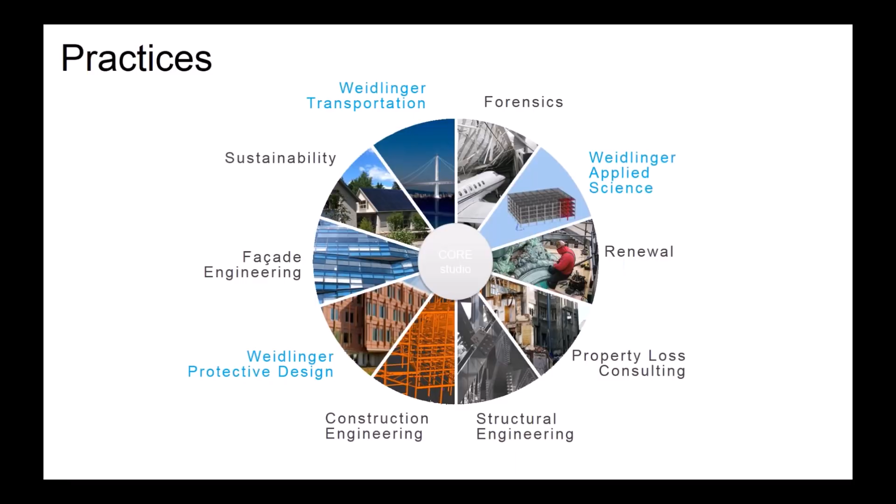If you don't know what that is, it's sort of our incubator for research, but more importantly, the center for our computational modeling and application development. It's sort of the center of all of our practices. That's the idea behind this. And we do a lot of these things - many more things than just typical engineering. Structural engineering would do renewal, property loss, and facade engineering. That'll make sense later when you see some of these projects that are not exactly structural engineering. I had this slide in there to make the point that we're a big firm, we're everywhere. I'm not saying that to sell TT, but to explain that not all this work is mine.

I couldn't fill an hour or 45 minutes with my own Dynamo work. It's not interesting enough, so it's a lot of other people's work. Forgive me if I stumble on any of it, but I know it somewhat intimately.

This is Core Studio. A lot of us are developers, and a few of us are more modelers, which is kind of the work you're seeing now, the Dynamo work. I'll mention a few tools we've developed that are Revit tools, but that's like a whole other presentation. Then we have Konstru, which is that break-off interoperability software that you may or may not have heard of, but I'll show a little bit about it.

More on Core—this is the different arms of the development stuff, like some in automation, some in visualization, some in interoperability. There are these different sort of wings of work. But I'm just going to jump right in.

This is perhaps the most in-depth one I'll talk about, and the one that's gotten the most traction in our office. It was very simple, low-hanging fruit in a way, and that's what Dynamo is good for. This is our RAM concept to Revit Rebar tool.

RAM is a structural software that we use. It does floor design essentially, and also does rebar design. What you're seeing on the right is the rebar placement by the software once it knows the loads and whatnot, and knows if it's PT or whatnot.

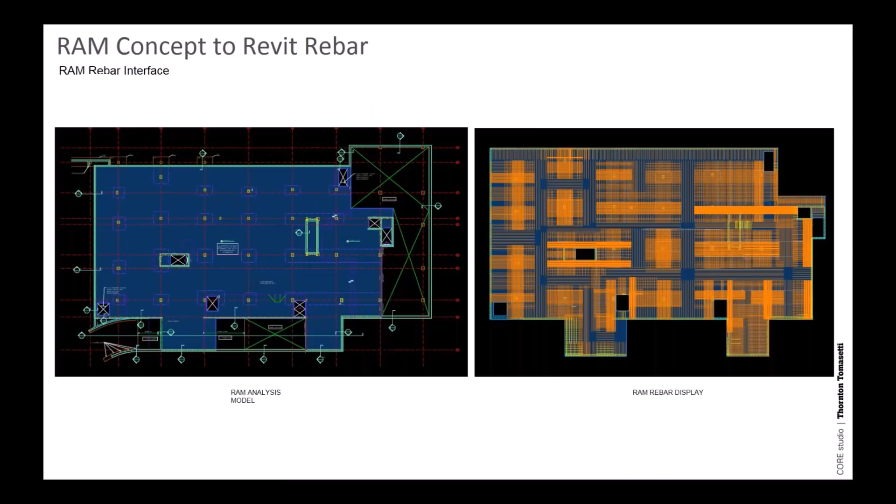It usually goes from this to an engineer who then simplifies and extrapolates, making assumptions. That markup goes to the modeler. We have dedicated modelers in the structural engineering practice, which is not as common in architecture, but perhaps more so now. Then eventually the modeler or drafter creates these drawings from that markup.

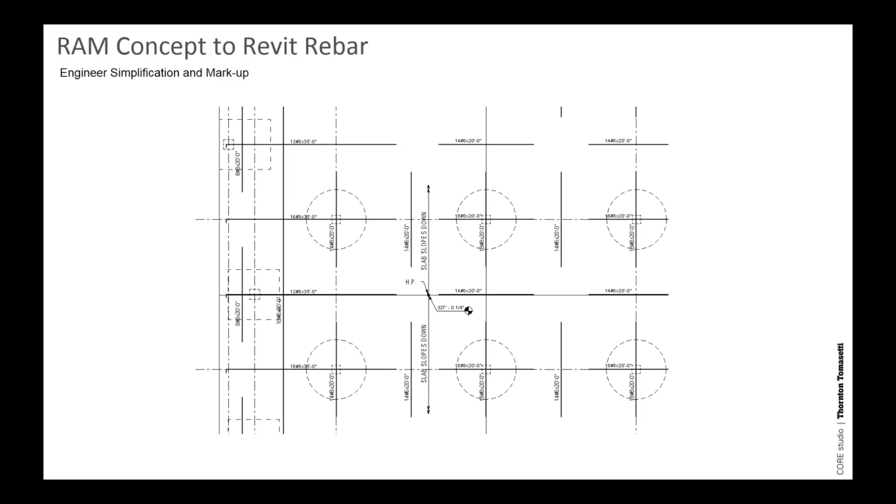It's a kind of dead one-way process. So we use Dynamo to create a direct connection, and in a way a loop, so you can go straight from the analysis software into Revit, which is an obvious benefit and makes that so much faster. You can imagine how long it takes to go from this to that, on every floor. So that was a low-hanging fruit, we should call it.

A couple of the things I'm presenting start from Dynamo and then end up as a custom tool that's later developed further. This is a great example of one. Dynamo becomes the proof-of-concept place where you can mess around and it's loose, and then later we push it to the developers who actually program it, making it a built-in Revit tool that you don't touch in Dynamo anymore, which I'll show later. There's a couple instances where that happens, and I think it's a common flow.

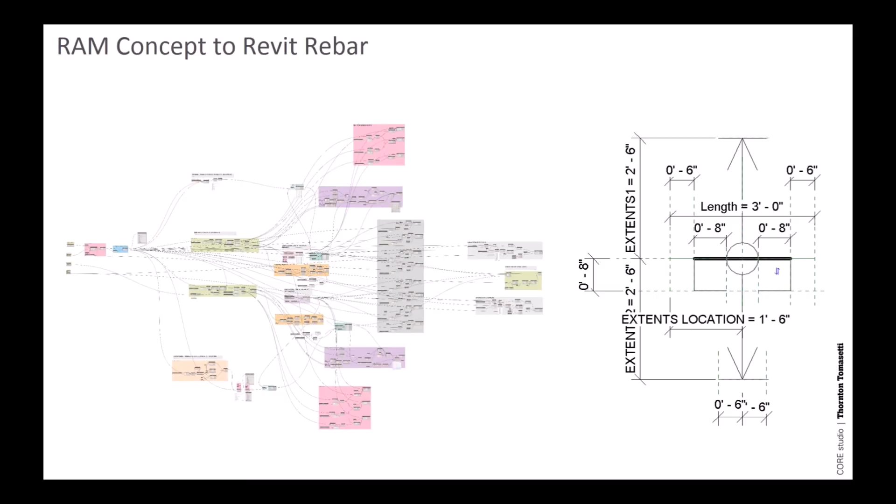It's like you test it with Grasshopper first, then with Dynamo, and then perhaps make a solidified tool from it. Or there's a workflow from Grasshopper to Dynamo—there's a lot of those, because it's so much lighter for optimization. The output is a database which has coordinates and other markings, like what the rebar size should be and at what spacing. So there's your Excel file, and that's a simple import into Dynamo.

I figured you guys knew Dynamo, or at least wanted to, and wanted to get into the guts a little bit, because it's the user group after all. So I thought I'd talk briefly in some places about the actual components we're using, or at least medium level in the components, instead of just higher level stuff like 'we did this and this.'

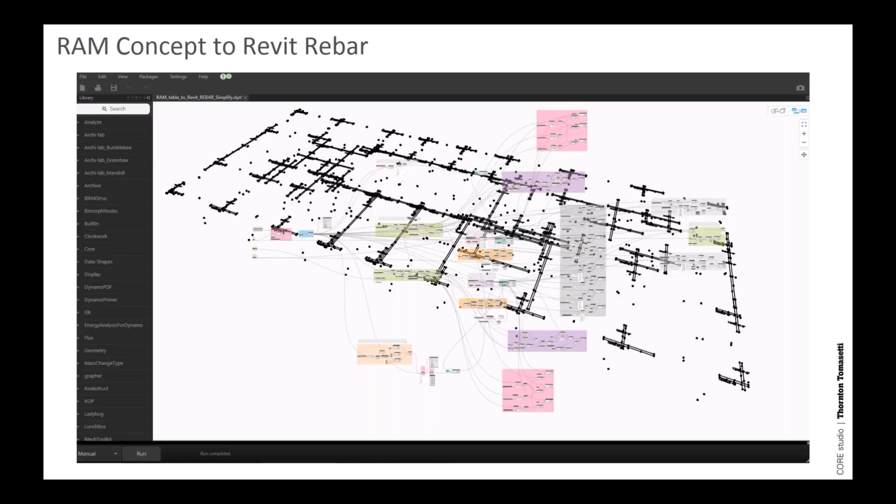So for instance, here's the inputs. It's pretty simple—you're getting your file path, and it's then sorting through Excel. The first part is you make the component first, you guys probably know that. You're instantiating the family, the detail, or the tag.

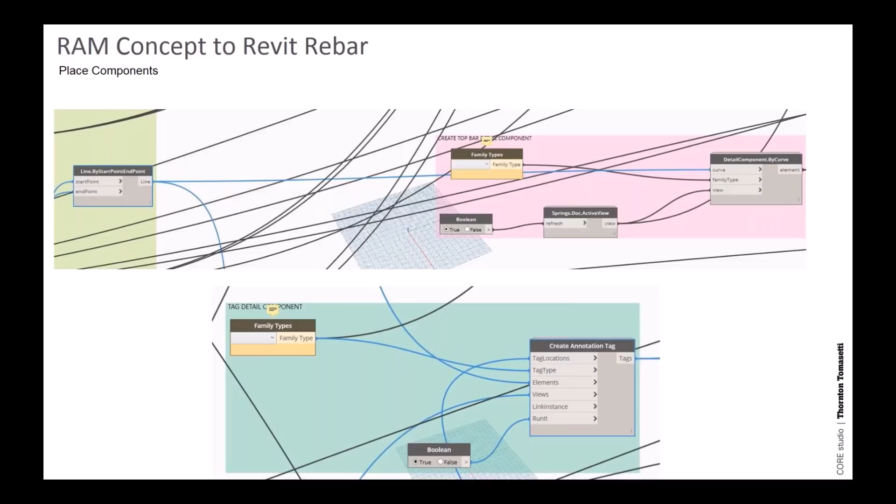In this case, the detail component—that part is a Python script that is taking the curve you made and placing it into a detail element, and getting the right... I forget what this part is doing.

Anyways, it's a script. Not everything is visual coding - Dynamo is so clunky in some ways. When you're banging your head against the wall, it's better to just code it, because it's hard to do if statements in visual coding in general, like in Grasshopper. And loops - we're in two while loops here - visual coding just doesn't lend itself to that sort of thing. So jumping into Python is way easier.

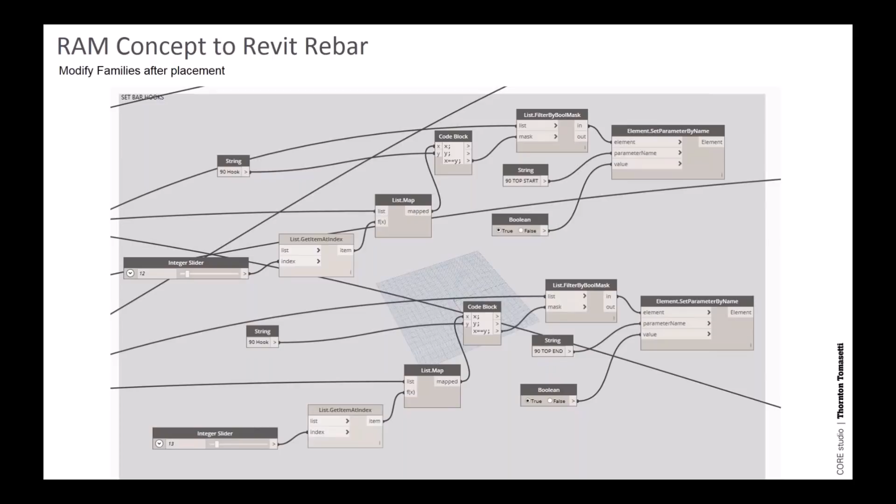The first step was putting the families and components, the elements in there, then you modify them and give them their data. So here we're giving them their tag names and all that extra data - the rebar size, filtering it out of the Excel and applying it with Element.SetParameterByName. You probably know that one if you use this - you use that a lot when you're getting into Revit.

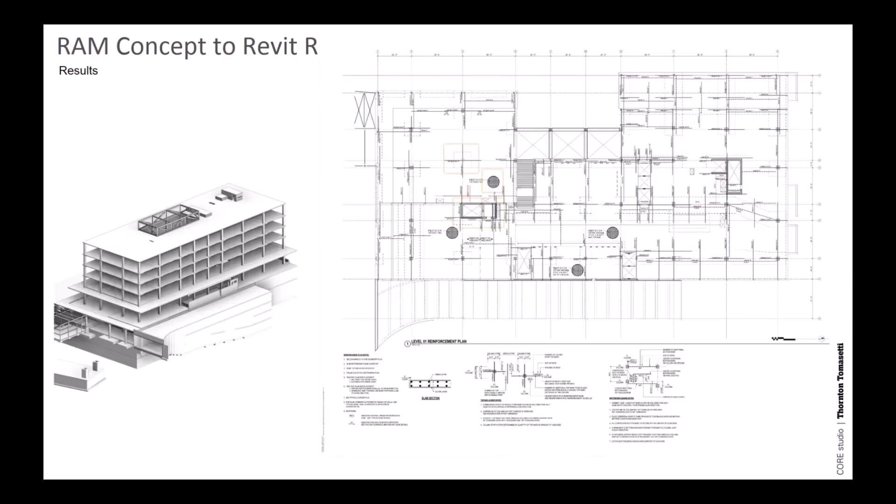So the final result, a building like this, there's your plan, and for every floor you have to do it with Dynamo, but it's so much faster. It's saving weeks of work essentially, more if you multiply it around the firm.

So it was obvious that we should make it into a tool, and this simplifies it much more. Looking at the Dynamo on the left versus the interface for the tool on the right, it's so much simpler, and engineers in our office can use it without having to worry about being intimidated by this or having to open that up.

In this case you can do the whole building all at once, which is way faster than even before. This allows you - it's made in Visual Studio - and this particular code, I forget what it was doing now.

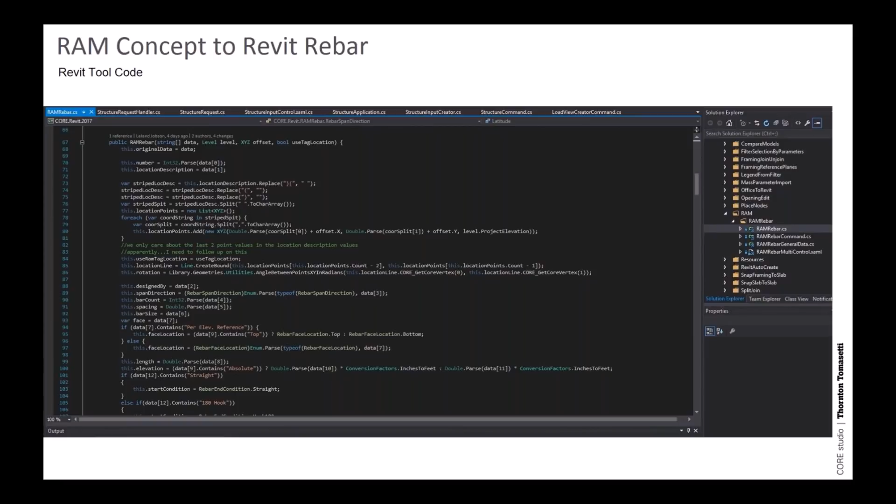Oh yeah, it's sorting through the points and placing the line first. There's a lot of these families. It's a few weeks of work to make that tool, but I think the payoff is pretty obvious in this case, and we always do this with the tools to prove their viability.

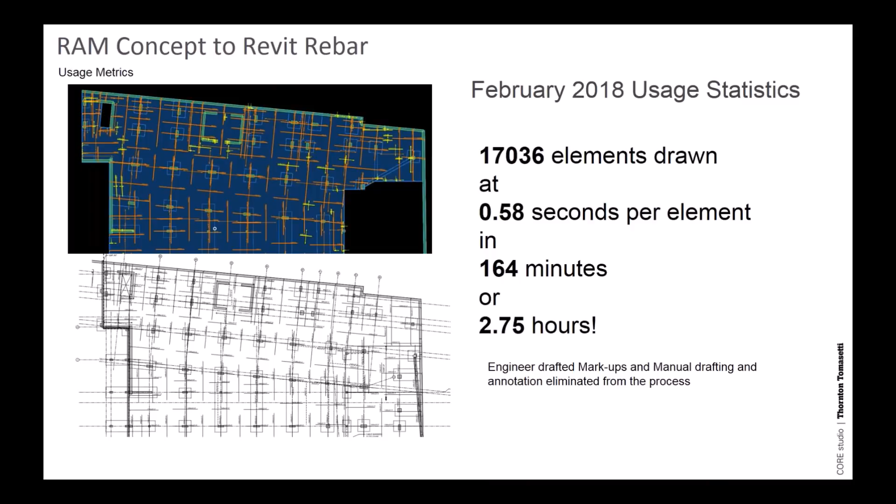The user statistics so far - we collect statistics for all of our tools. I guess that's not time saved, but that's how much it's been used. It's not that useful, but this many things have been drawn, and if you multiply that by how long it would take to do it the normal way, you'd get probably something like 200 hours. That's what's missing in this graphic actually.

So I'm just going to go through a lot of little fixes - we just use Dynamo for all these little fixes here and there, you guys are probably the same. I'm going to go through a bunch of them. A lot of them are translations between different things - this is ETABS to Dynamo into Revit.

Konstru works really well for all this, but sometimes there's more custom stuff. In fact, I know this is custom because the walls are canted and twisting a little bit, and Konstru wasn't dealing with that at the time. What was I going to say about this?

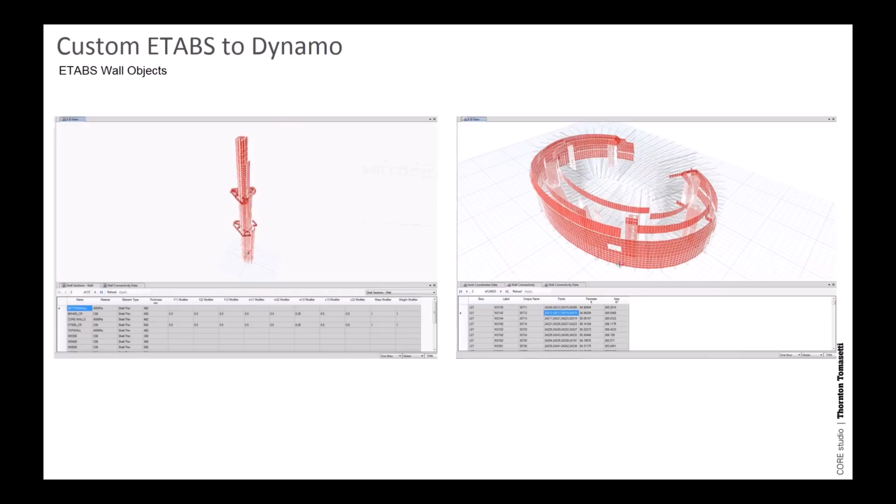ETABS is another structural software that we use. It's for framing and floor design, and it's good for towers. So same thing, you're exporting.

I think this is with Rhino - getting the lines in, recreating the curve, wall by face, recreating the wall like wall by face, or getting the individual panels that you had there. Then ETABS, you can see they're built in, and then building your curve larger so it's a more continuous wall, and then wall by face, with a slight amount of twist in it.

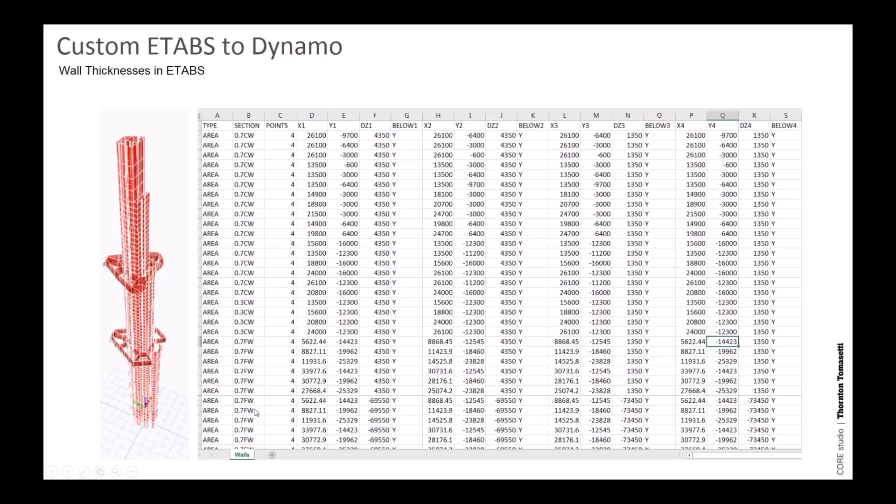And then apply a curtain system to that. For the core of that building, you're doing walls but need to apply thicknesses, and you can see that output from ETABS has these different thicknesses throughout, so grouping them and applying them with Dynamo.

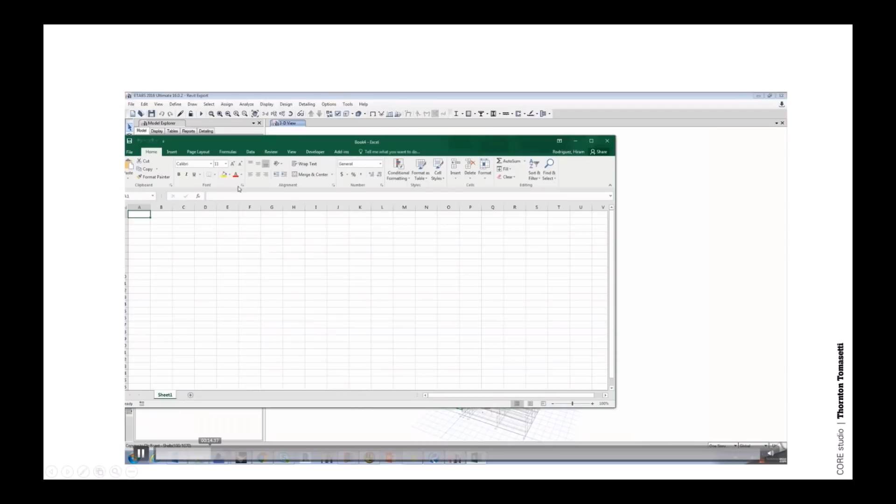I think I have a video of that, but these videos are often a little bit slow, so I might jump forward. So there's your ETABS model with different thicknesses. Send it to Excel first to get the thicknesses, and probably Rhino for the geometry, then we're importing those thicknesses and applying them, grouping them.

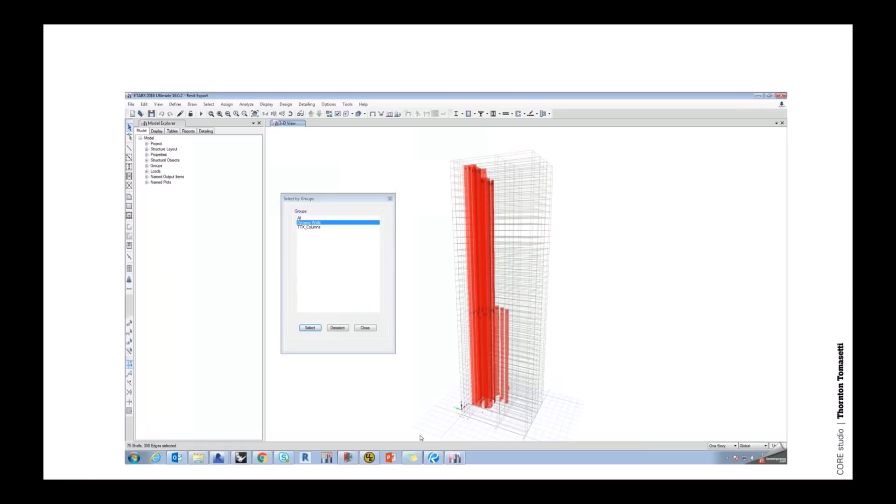So that's the simplified version, but a kind of what would have been a fairly complex task, slightly simplified in Dynamo. Same for pier design. This one is a little more—you could of course do that with other transfer methods, but Dynamo just speeds it up with the assignments and things. I think Konstru can basically handle this now, but that again is a sort of proof of concept that we then build into other softwares. That's how a lot of these work. This process works.

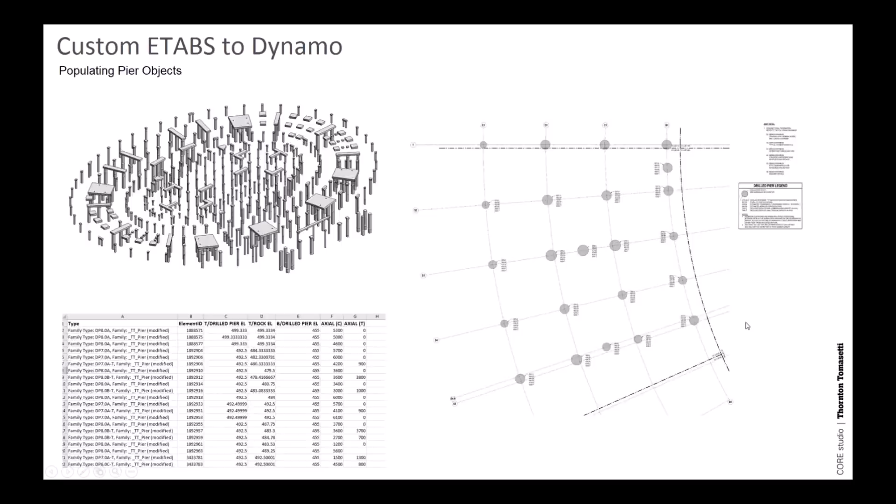Custom pier inputs. There's a bunch of different parameters and tags that go with the pier. This is the final plan you need in Revit. So you've got a few different parameters first that you have to design for, and then that end up in the tags—what that ends up looking like in plan, and a few different parameters that need to get into the design software, which is actually in this case an Excel file. There's a couple instances, especially with axial loaded things like columns and piers, where we just use a very complex Excel file to design them. So basically, we're making the building in Revit, and then with this custom pier family that has all these parameters, we're exporting that to Excel.

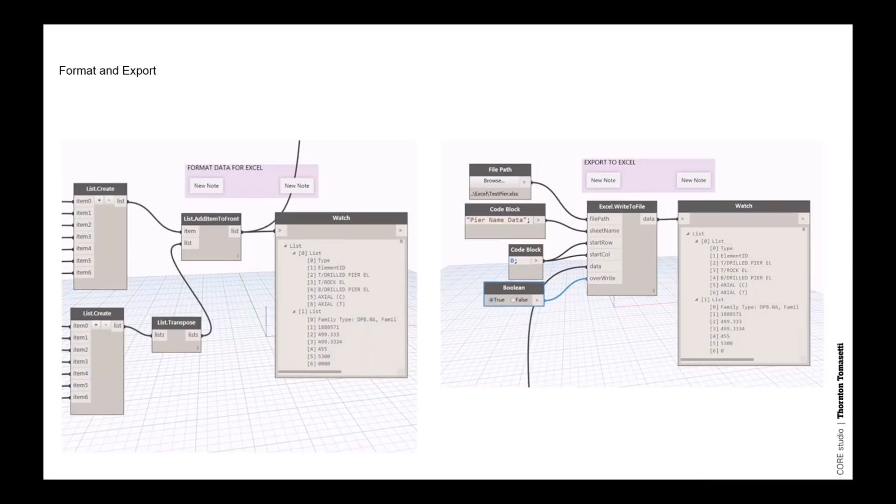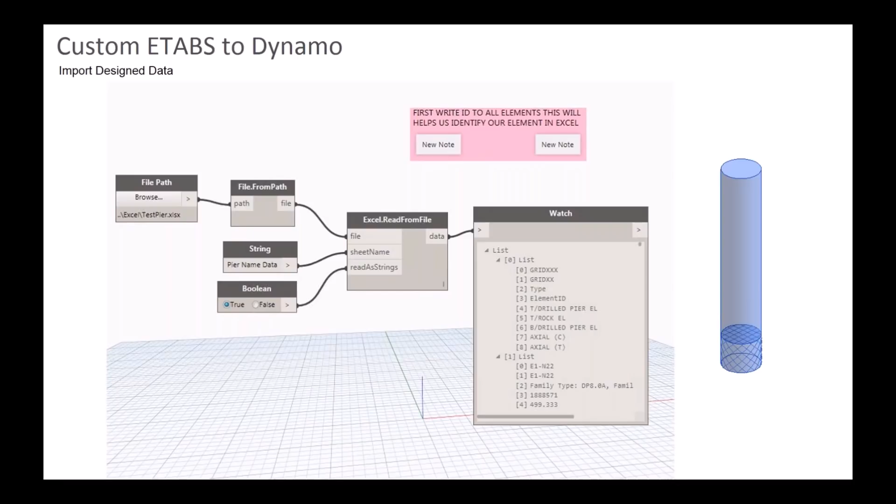So this is all sorting it for Excel. These are the different headers, and then using Excel to design the pier with the thickness and length, or perhaps just thickness and rebar count, and then importing it again, and applying that to that family—instantiating the family, or setting the parameters again for the family that was already there. That updates the tags and gets you the drawing you needed.

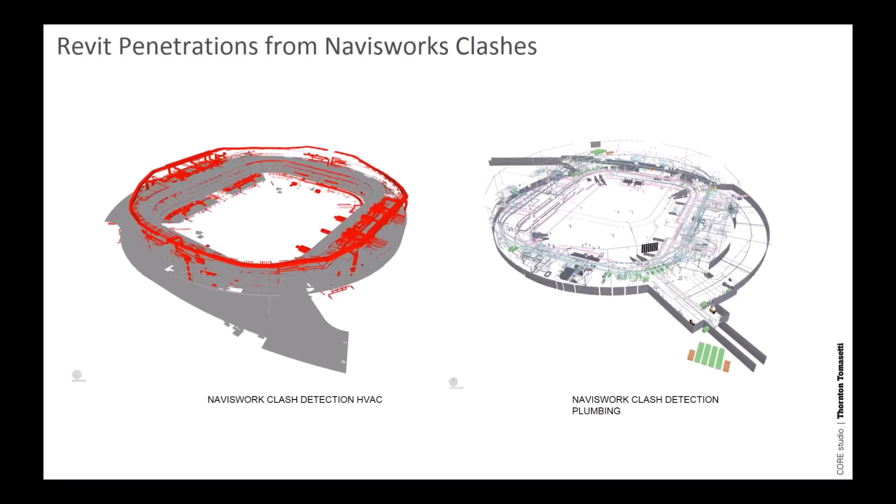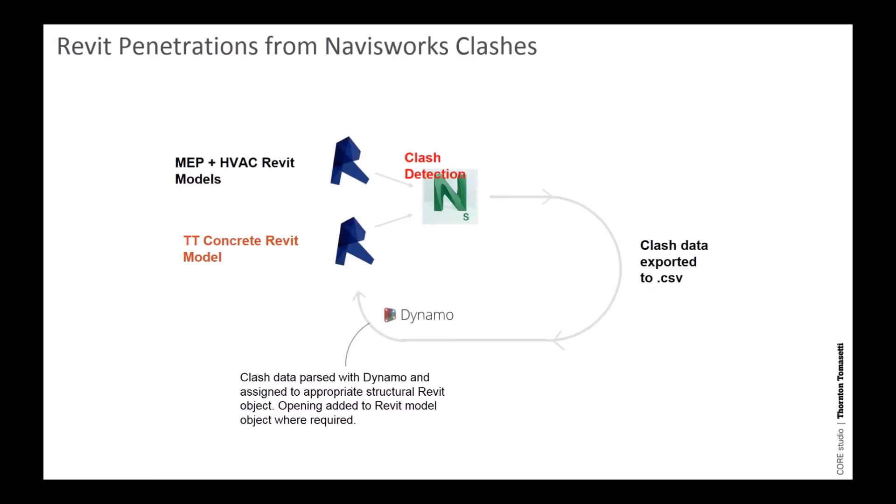Using Navisworks, using clashes, like designing Revit penetrations with the Navisworks clashes. So there's your clash detection in Navisworks. There's HVAC and plumbing—put those together, and we've got to design these openings in our shear walls or any of our concrete. So basically you're building them in Revit, you go into Navisworks, and through Dynamo you go back into Revit and adjust the concrete model after you get the clashes. I think there's a video. And the Navisworks imports were custom tools that I think are probably out there.

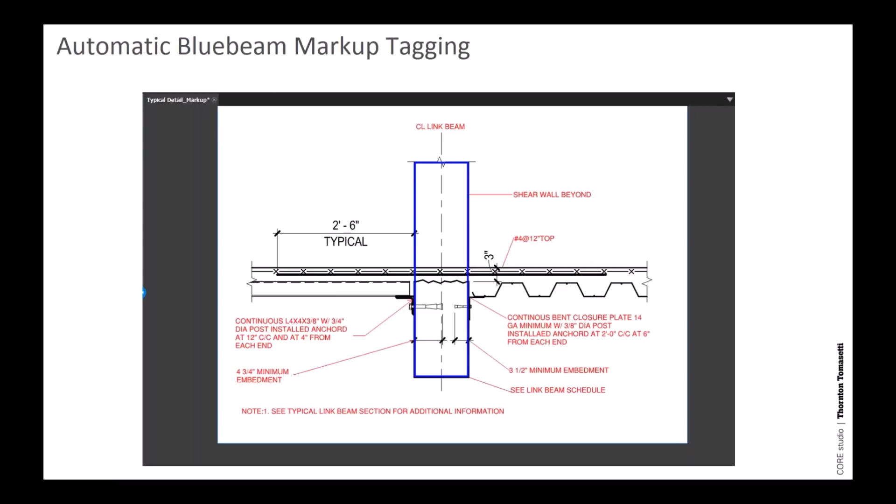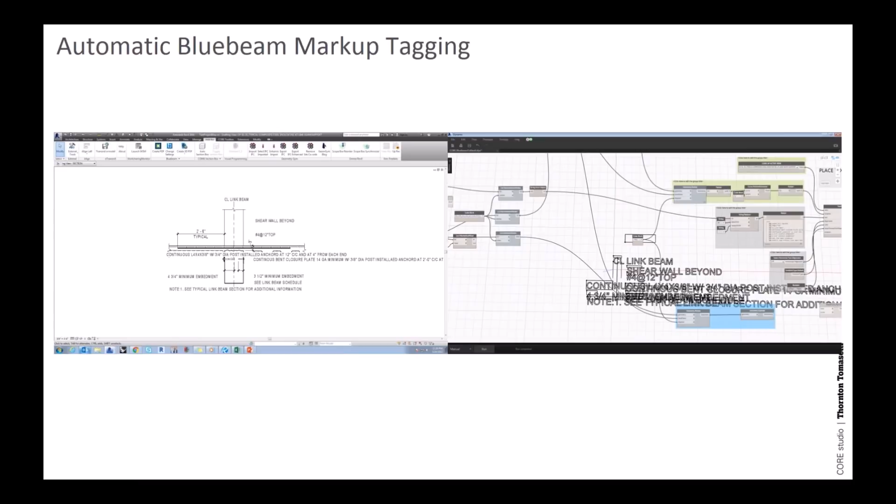And then Bluebeam to Revit. This is just another example of how the engineers make these markups, and it takes time for the modeler to then put them into the Revit file. So we could just automate pulling it in—the drawing started in Revit, that's on the left, and then an engineer marks it up in Bluebeam with these tags, and then with Dynamo we can bring in the tags and apply them to the actual detailed drawing, and even draw the leaders and stuff as they were in Bluebeam, though of course Revit treats the point-to-point different, and some of the formatting is different, but that speeds up things a lot, and takes less work for the modeler, and then the engineer can just sort of work a looser way.

You don't have to always be in Revit. I think a lot of these are about getting out of Revit, simplifying that whole thing. I think this was a video, but again, it's probably just what you already understand. And the Bluebeam import was a custom thing we had to write—one of our Revit API guys figured out the Bluebeam thing.

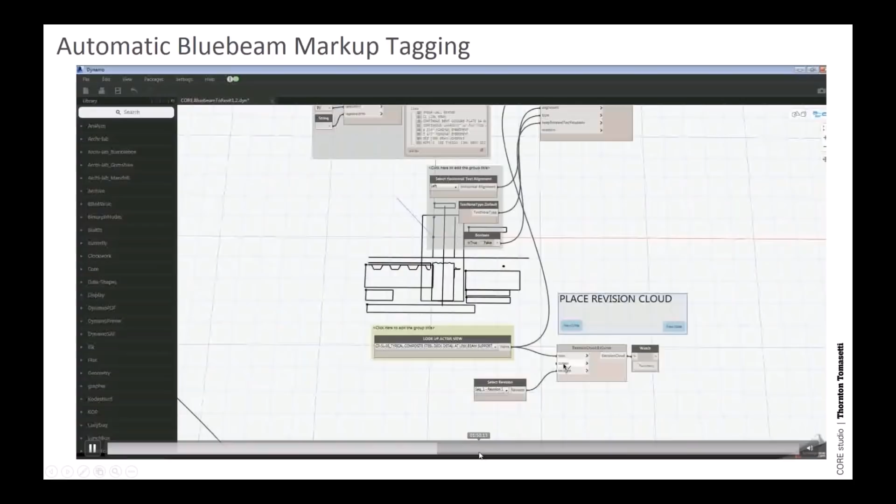So you're calling that file, and then you can imagine what this is doing. And then there's revision clouds too—yeah, so there's the cloud. Yeah, and this one is just showing revision cloud placement as well.

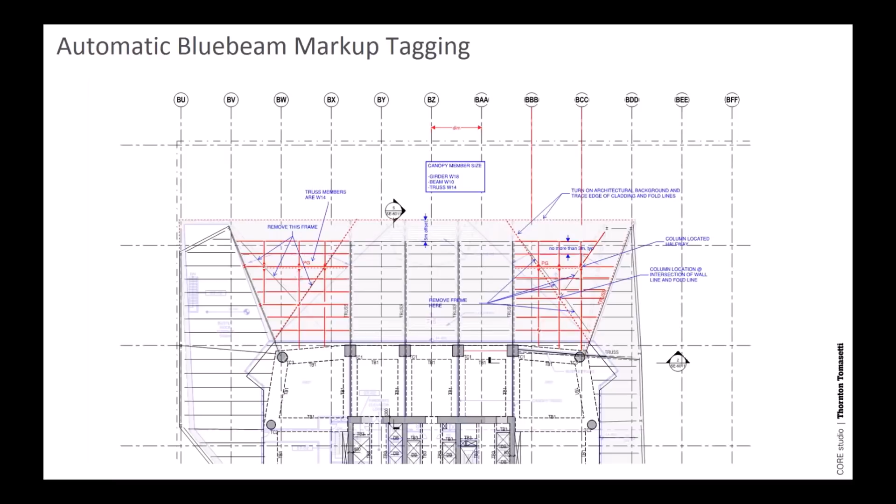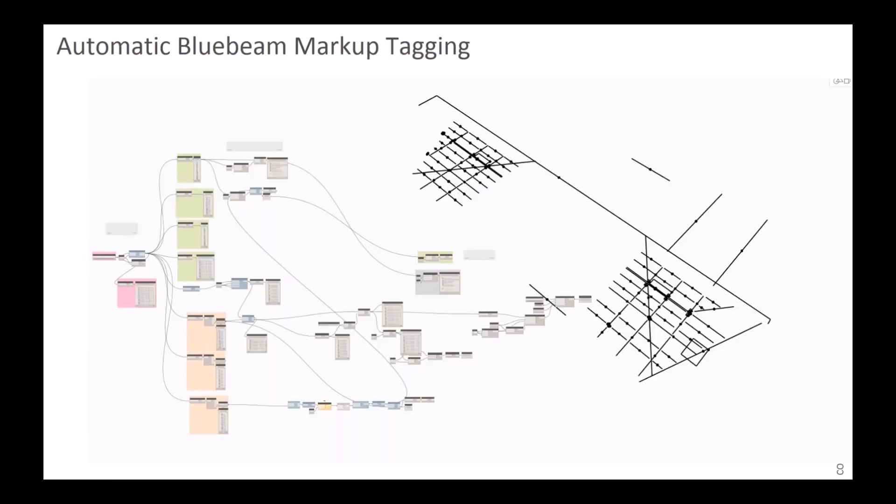And then taking that a little further into actual modeling, mark up a plan. In this case, all we had were the structural plans, and we knew that we needed a new beam system in these areas. We had a Rhino model and not a Revit model. So we're bringing in from Bluebeam these frame design drawings with sizes, and then bringing that into Rhino, and using that to project it to the surface that's needed, because you're starting with a 2D, and in Dynamo you're 2D, and then going to Rhino for the projection, and then back to Revit.

I think that's a video as well, back to Revit eventually. But in this case we're using Rhino for sizes, and also using Rhino to kind of check the model against an existing Revit model. So there you're seeing the new beams are over there, and then these existing beams are changing in shape a little bit—and there's the roof surface.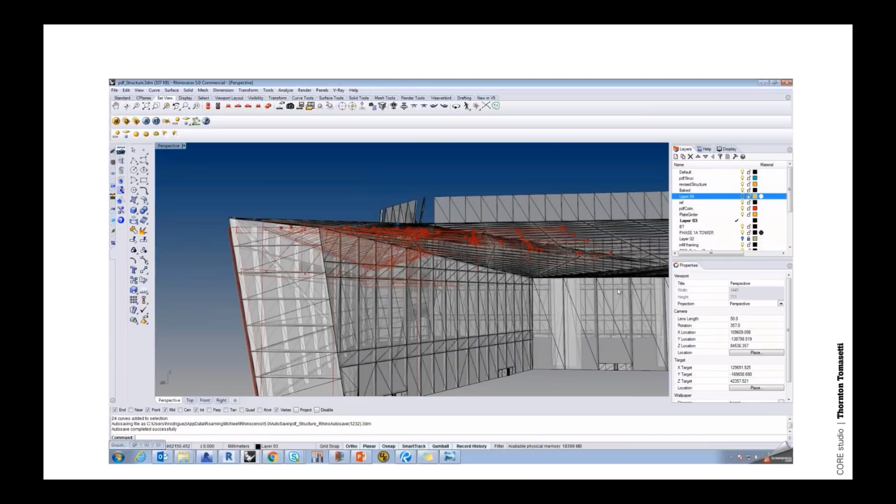So we're comparing, and then we'll go back into Revit with Rhino again. So there you're seeing it come back in - I think we were matching these, or finding similar ones and then adjusting them so it's not doubling up on beams that existed already.

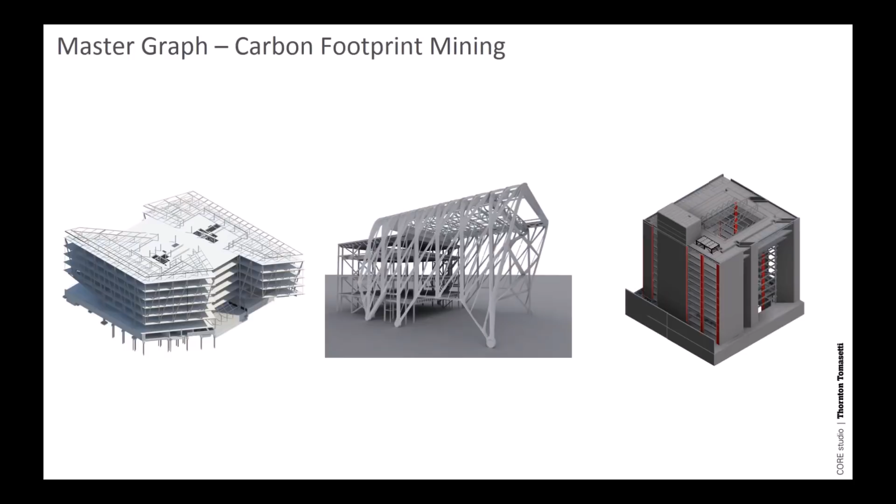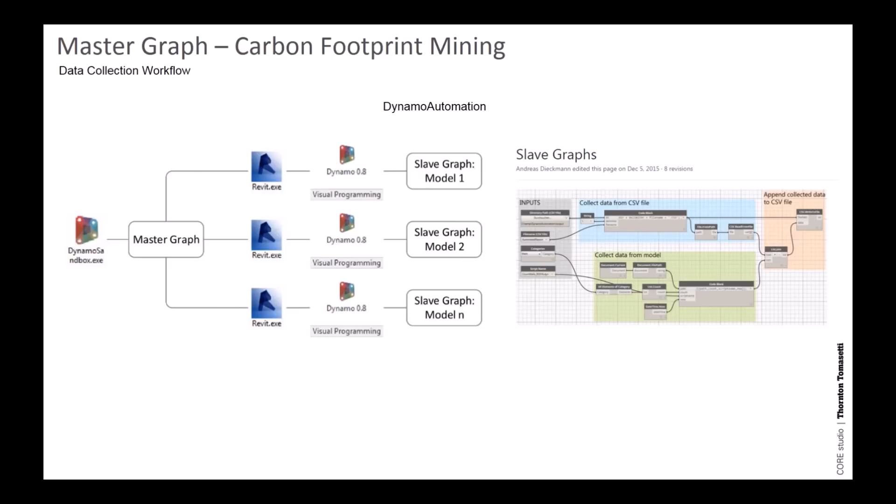I don't know if you guys have ever used MasterGraph from Dynamo Studio. We were using it to get a database of carbon footprints for all of our buildings. Now this is its own kind of data mining tool, but initially we were testing it with Dynamo using MasterGraph, which has slave graphs. The MasterGraph goes through and tells it where every Revit file is for each project, and then the slave graph queries that project for steel amounts, concrete tonnage, concrete volumes, and that sort of thing.

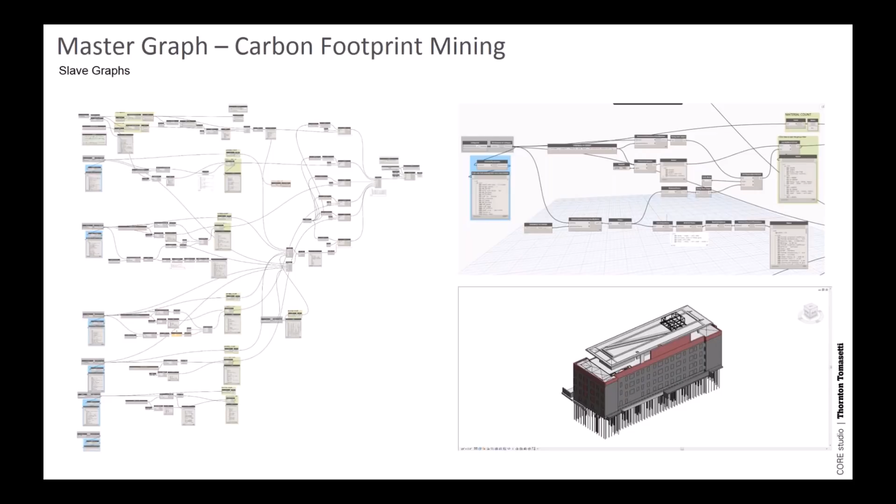So this is the master, looking for the folder and writing the journal that it does, and then the slave graph, which looks through the model for total steel numbers and compiles that, so you get total volume or area of, say, concrete - in this case all these different kinds, which makes it kind of harder. I guess this is by floor as well, or level.

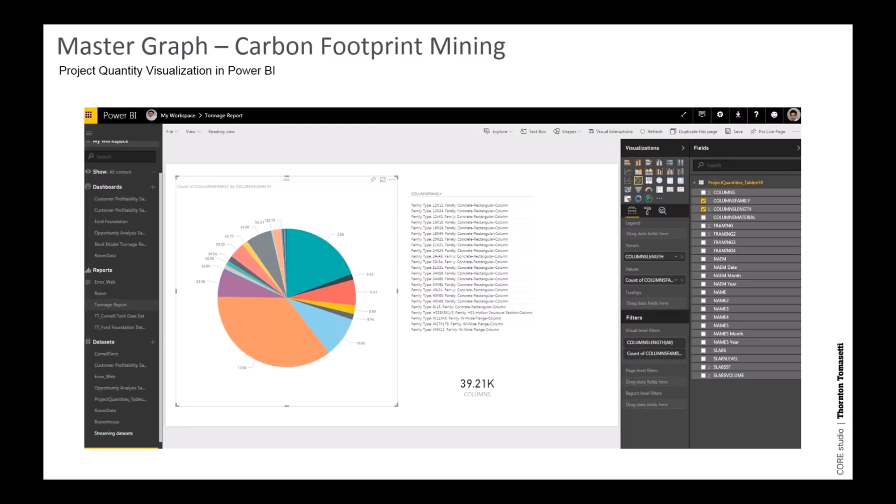We were just looking at all that data at the time in Power BI, but we've turned this into what we call Spotlight, which I'll show you later - it's a data querier for Revit models. So you really understand what all your quantities are, because Revit's not good at visualizing all that. So we made that little tool - I'll show you that later though.

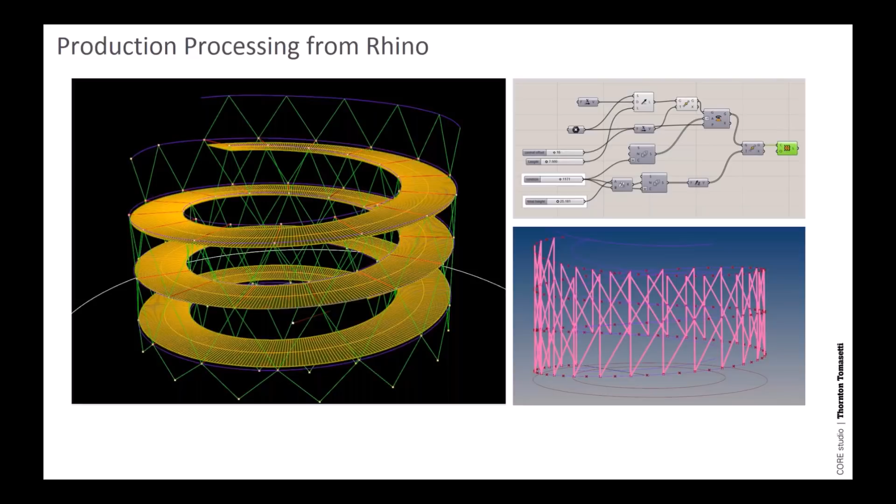We're also making the diagrid in Rhino, because you start with that spiral, make the diagrid, make a few different instances, and here we're showing it to the client, I think, in Spectacles.

Well sorry, Mirar, which is what we call it now, which is an easy way to share BIM models - I will show you that again as well later. But then we bring that in through Dynamo, and then apply it and get your unrolled shape.

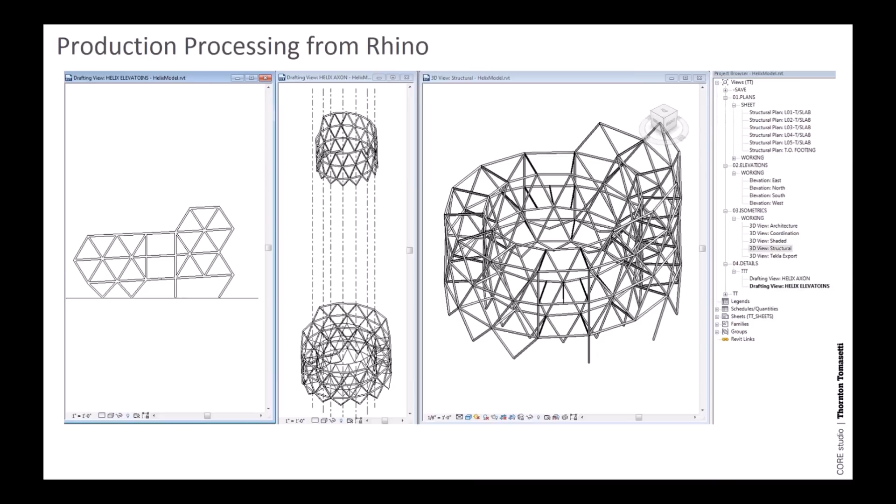The important part is this unrolled thing - it would be too hard to do that in Dynamo, at least we hadn't figured that out yet. Unrolling is so much easier in Rhino. And there's the sheet with that drawing, which would be hard otherwise.

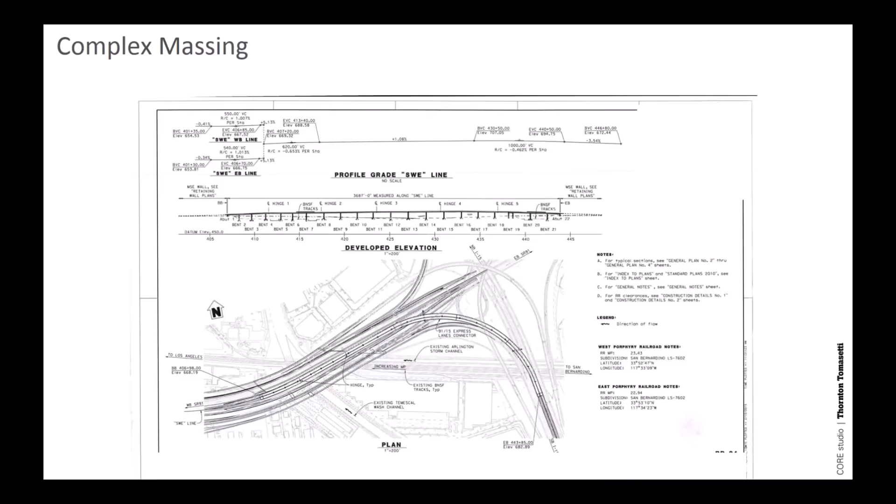Complex massing - this is a funny one. Again, I know I've been doing this a lot, but we're going from Rhino into Dynamo, so you're doing a lot of the processing in Rhino. For instance, breaking this up, where you have these old school drawings, and then drawing the structure, breaking it up into the sections that are needed.

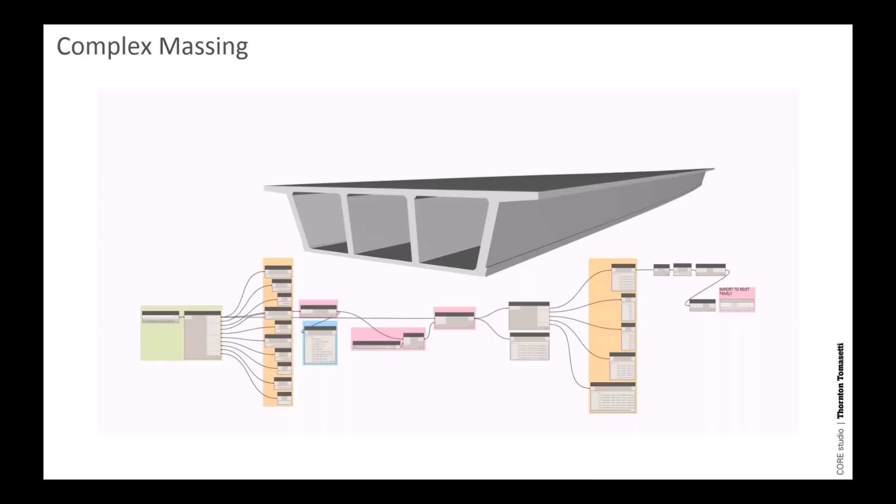And there you're creating the mass in Revit. But once you have it in Revit, you can do a lot more - you could have perhaps extruded it somehow in Revit, but it's easier to just go this way. Then you can make your drawings from there and visualize it.

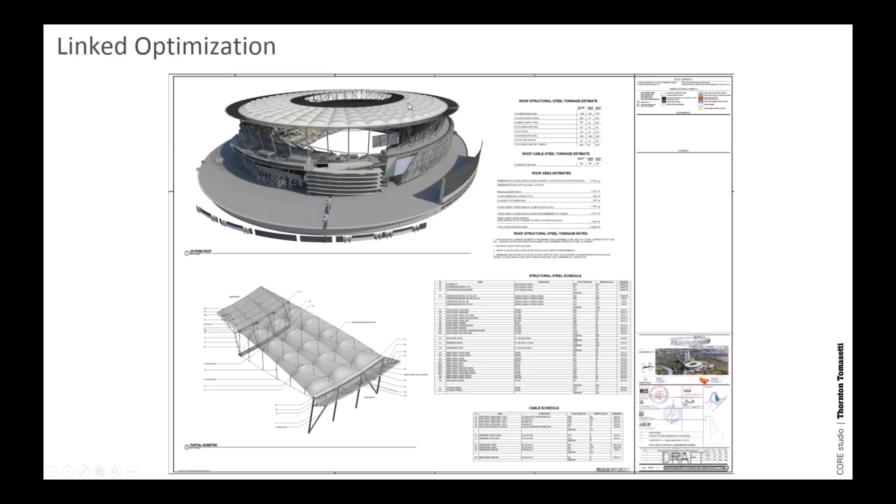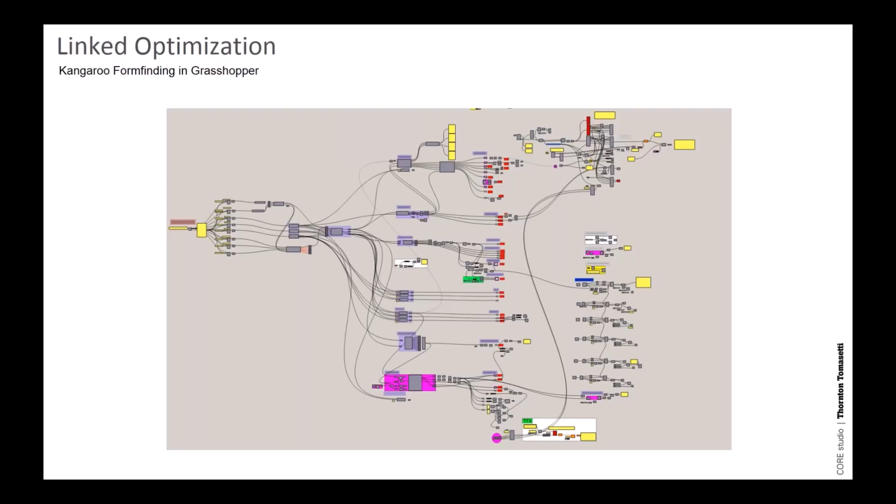Another case, sorry for this starting to sound repetitive, but we're optimizing in this case the form finding in Rhino, then in a live link with Revit or Dynamo. So we're optimizing this roof form, this fabric minimal surface roof, with Kangaroo in Rhino or Grasshopper, and using that - optimizing for different tensions and forms and how much we know the deflection is going to be. Then changing the form, and bringing that into Revit with Dynamo.

That's just showing it, which is like a NURBS surface from curves, I think, and then we were using that. So there's just the final thing - that's just an easy way to get those surfaces in there and have it kind of linked.

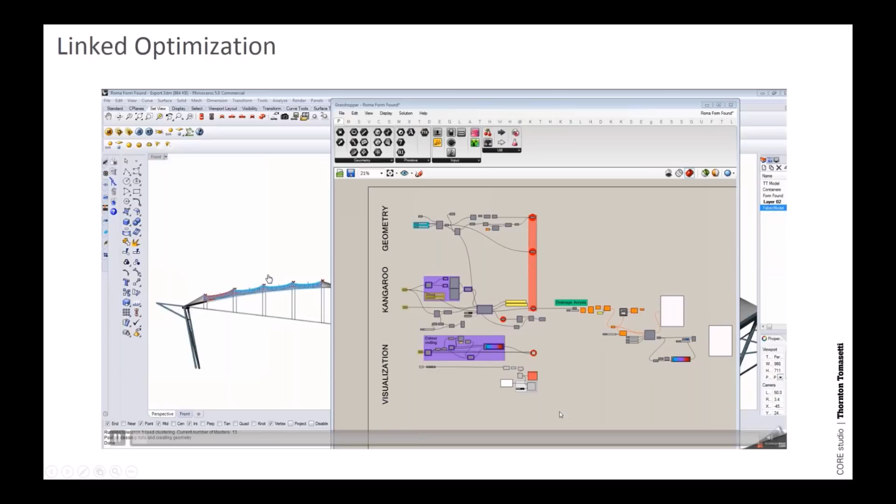I think this was so that we can play with it, which we're doing a lot as we're testing this in other software, Strand and whatnot, which gives us new parameters for Kangaroo - so playing with the shape. I think in this case it was a little less like a dynamic live link.

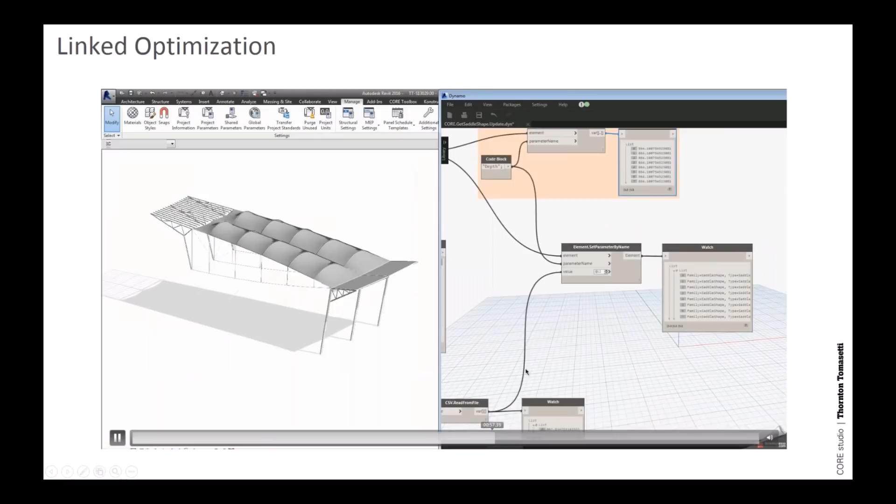Bring that in through Dynamo, and then rebuilding the surface with the NURB surface, I think. Can you explain this process with me? So the testing of tensile strength is still done in other software. Yeah, but what are you doing? How are you optimizing it?

With Kangaroo we're just adjusting the parameters based on what we know the geometry is in Strand7, and then using Kangaroo to match that, because it's a lot easier than going from Strand to Revit. We're recreating it based on what we know will be the depths and curvatures, because it's a good approximation of minimal surfaces with various tensions, since you're basically fighting one tension against the other because it's an anticlastic surface, and that'll get you what you arrived at in Strand.

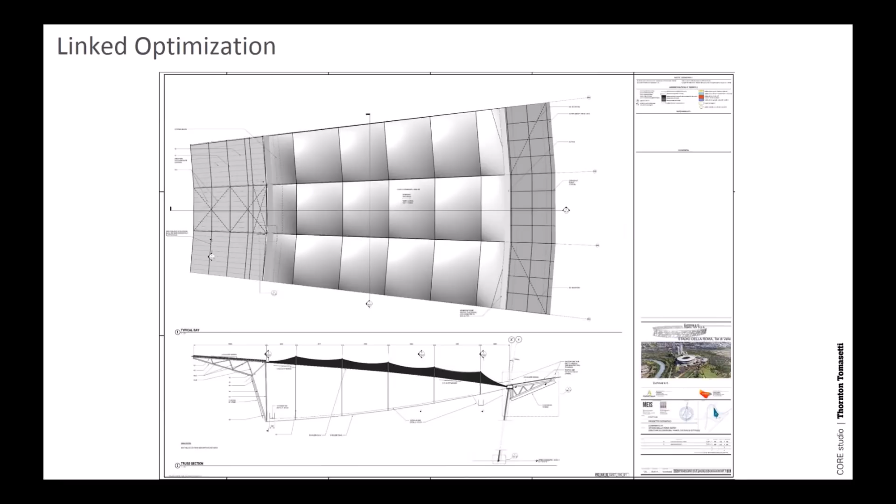Otherwise, you'd just be importing a dead DXF. So yeah, that's what that solved. And then we were doing many iterations that way, which is helpful.

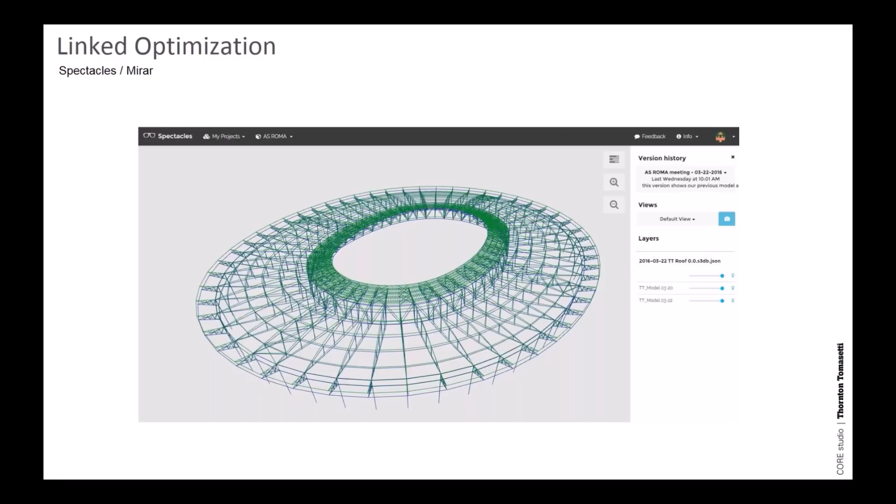And then this is again what we call Mirar now, which is viewing, or we could send these very lightweight models on the web just as a web page to share, instead of having to open a Revit model to look at something. And then we were doing line of sight analysis.

This is we did more complex ones. This is not the generative ones you're used to. Probably this is more just an analysis of blockage. But in this case, like the one we're seeing in Dynamo, I think it's just coloring by vector length, or by sight length in this case.

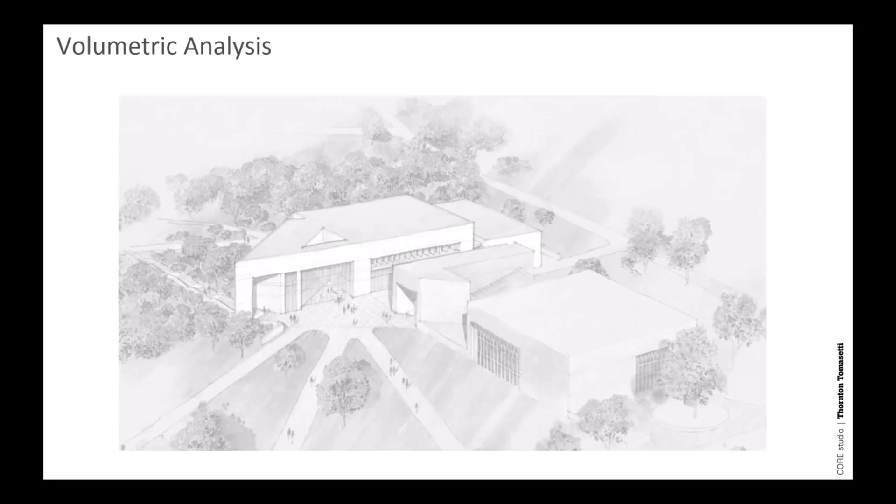So that's kind of a simple one, but that's also possible. I'm blowing through these - another one, just all these quirky little uses of Dynamo that I wanted to share.

Another one, we're looking at topo, and we wanted to see how much soil was moved by this particular building. And for some reason, this is not me, but Hiram wanted to do it in Dynamo. I think because the building was already in Revit, and he didn't want to bother bringing it into Grasshopper, though of course I would have done it in Rhino.

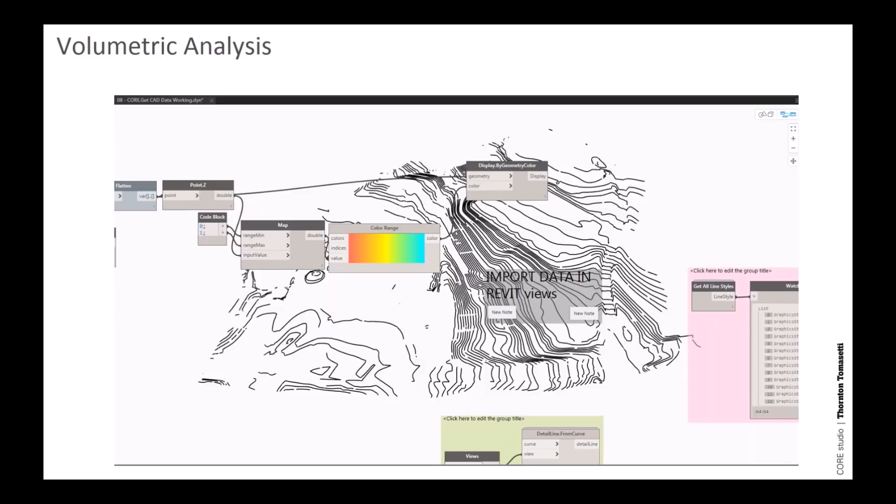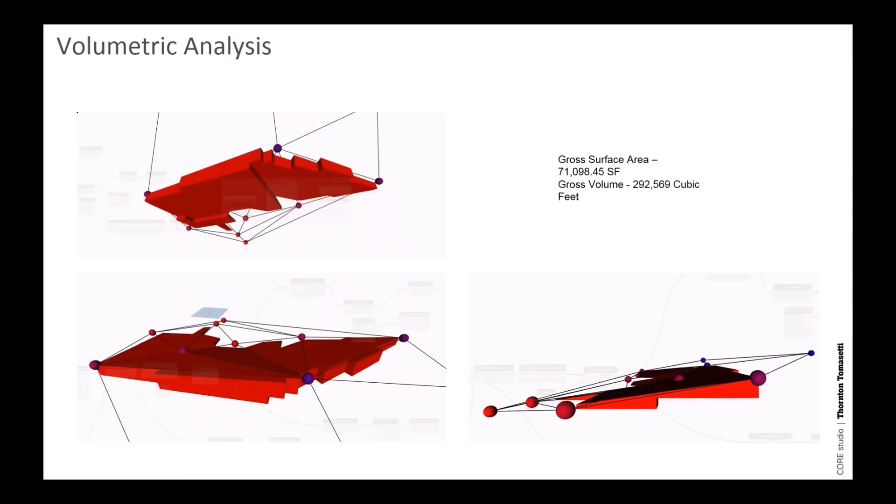But here's your building that's already in Revit, and then you just have to create a volume from it. He made this very simple soil volume that he got these points from the geological subcontractor, and then used that to make the surface, and then you extract your volume using Dynamo like a Boolean, and that gives you the number. Basically, the contractor wants to know the cubic feet of soil that they had to move - that's what they'll calculate their cost from.

This is a fun one, more recent, a little more applicable to structural engineers - visualizing demand capacity. That's usually something we do on existing buildings to make sure that if we build something on top of it, the existing columns can handle it, that they have capacity for the new stuff. Or just what our forensics practice does, or property loss, to make sure that the building, even as designed, can handle itself if they change the equipment, or if something went wrong and they want to test that it was designed correctly.

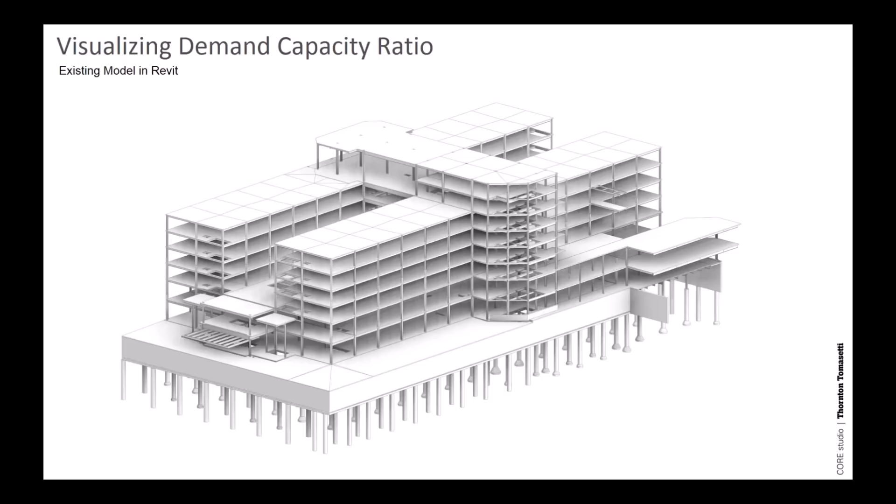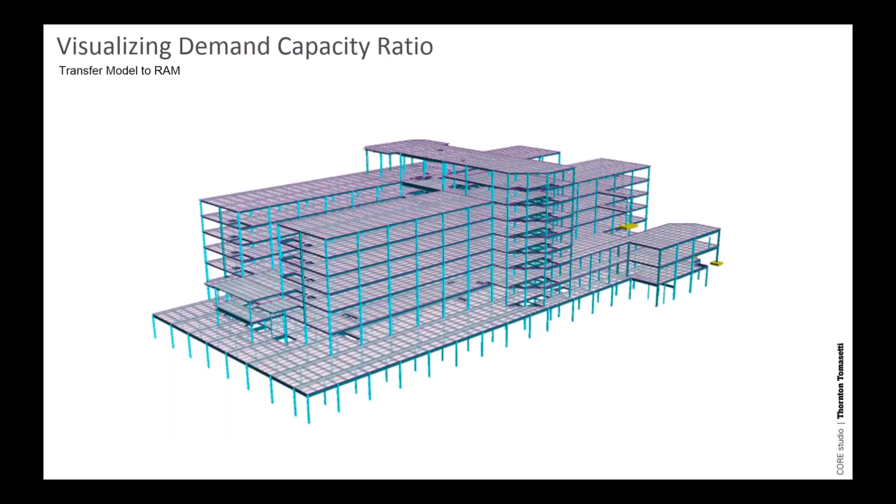There's your output, and then we just bring that back into Revit and visualize it. It's a very simple, useful visualization. So you have the red as the load, current or new load, and green is the capacity. So wherever you don't see green surrounding red, that olive shape means the red has exceeded the green, which is capacity.

And I have a better example of that. I think, like I was saying, we start in Grasshopper as a proof of concept. Sometimes then we do it in Dynamo later, and it becomes a tool - that's sometimes the life of these processes. So I think this was Grasshopper, anyways, playing with an existing building.

I'm gonna pause this so I can explain it before it goes too far. Existing building on the bottom, building a new one on top, playing with configurations for the architect to know what building shapes they can use. Of course, you wouldn't be playing with a form like that - you'd know what your core depths were, but you can see a live loading diagram over here on the left of that pimento olive thing.

It lets you know when you've exceeded it. In this case, it's an old industrial building with big columns, so it has a lot of inherent capacity and never really exceeded it, unless you got higher floor heights. As you get these higher floor heights, you're starting to approach where the core hits the columns. You can see these middle ones.

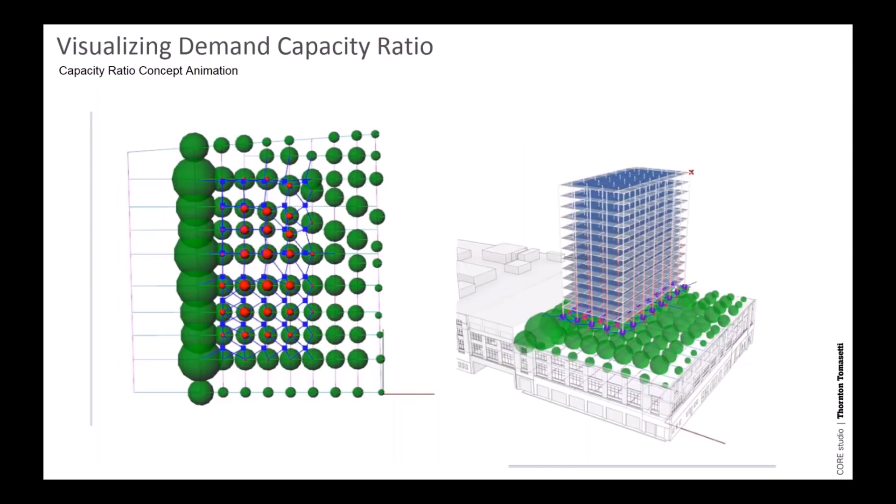That's a really useful visualization for the engineers to have in Revit, and to even include in a drawing that's shared with the client, so they can know if it's working.

This is a funny one. This was research that one of our core people was doing. It's really research on using Revit for data visualization, but it happens to also be about active shooter analysis, and he's using NetLogo, which is an agent-based modeler for a couple things, but also for this.

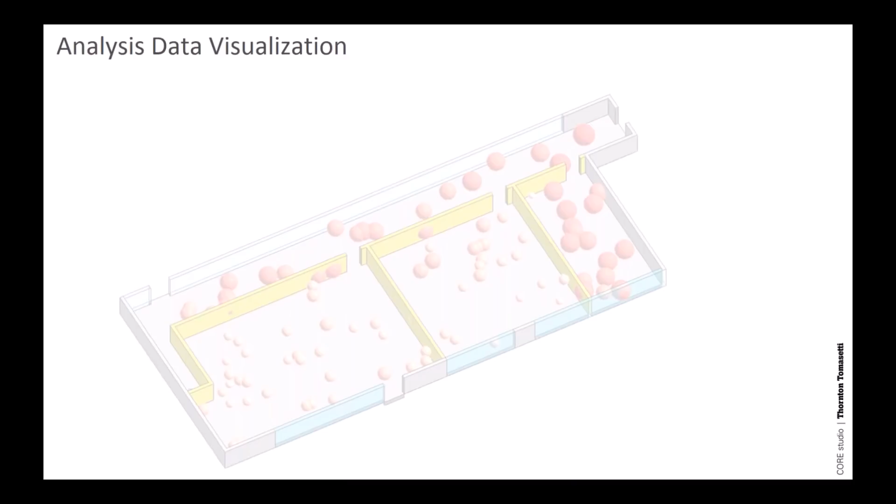This is a really weird thing to talk about, but the output is these scatter plots that don't make a lot of sense. If you look at them, you inherently don't really know, but he's trying to make it related to the model geometry, so that you can compare options.

Doors were placed in this one, and he wants to compare how the two frame up in the simulations. So he wants to have the dots, like you saw in that first image, on the model and sized according to their hit count, which comes out of the analysis based on the placement of the shooter - the success or failure of each location.

So you make a custom family that you can then populate with parameters later. This is a common theme now with Dynamo.

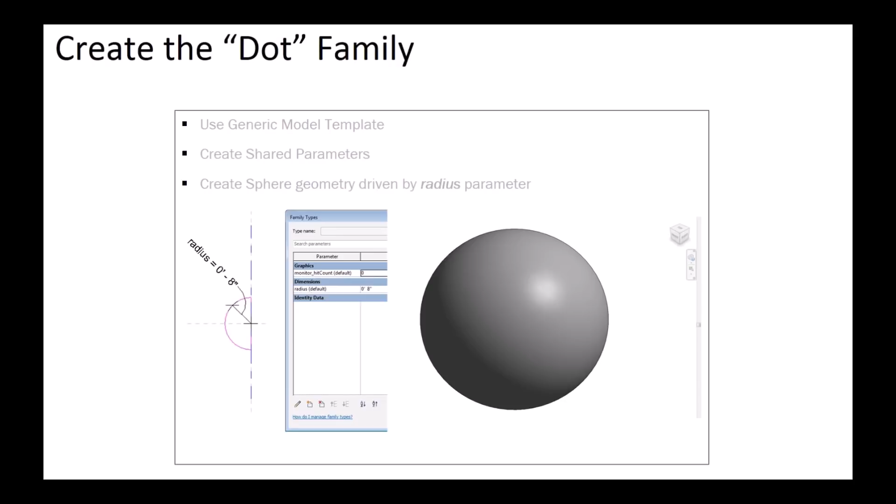You're just seeing there, setting the size and the color coding based on the output from NetLogo. There's your family, you know, find the family.

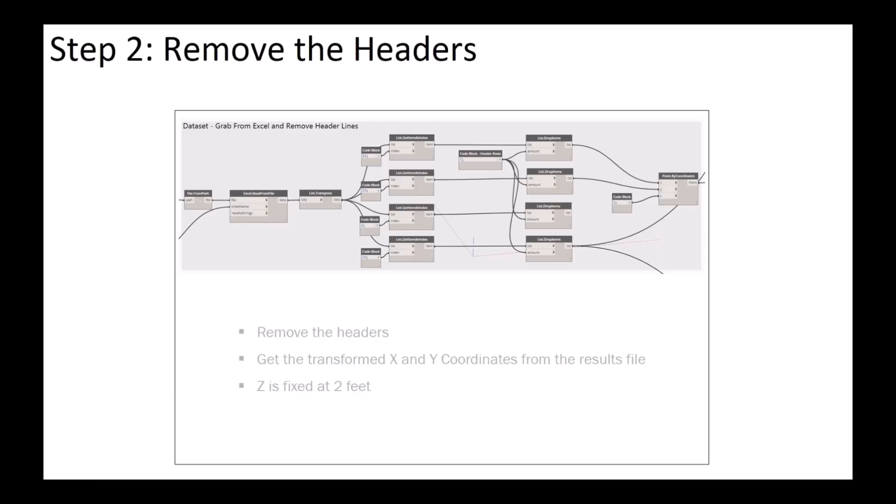This is a little more in the guts, but this is pretty simple stuff - processing the Excel data, removing the headers, applying the XYZ columns. Then placing the sphere, setting the parameters, scaling it. This is all really simple stuff.

Scaling it by the hit count, sizing it that way and coloring it, and then getting much more usable data to look at, because now you're seeing how the geometry is affected by, or rather affects, the situation.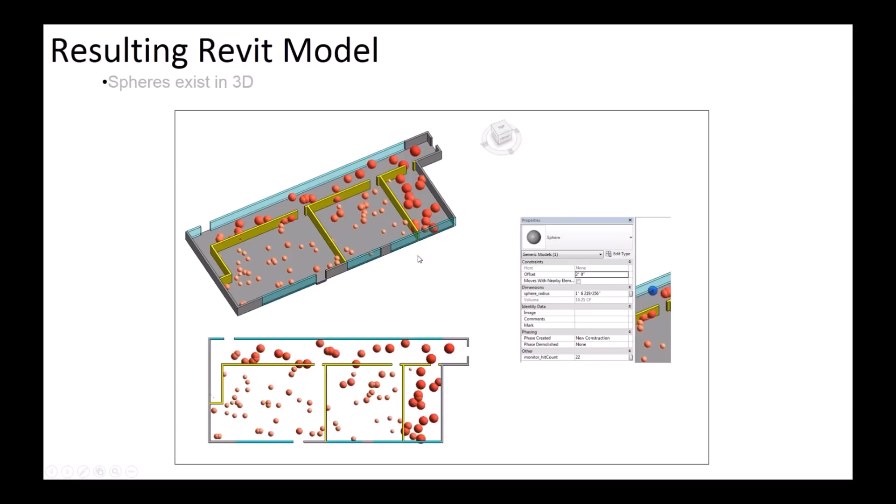All right, so I said I was going to talk about some of the application developments. I've gone through this faster than I thought, but I'll just go through these at the end.

Mirar is our tool, which is what Spectacles turned into - I think this probably started in Dynamo. It's our lightweight web viewer for BIM models, and now we actually use it for basically all of our models, like all of our analysis models and BIM stuff can go into this web viewer, which then can have an embedded link that can be sent.

Not only that, but you don't need Revit to look at the files, which is really useful if you want to share stuff just to see it quickly. The other thing is we're now using that to kind of be the home base for all of our visualization for the analysis results.

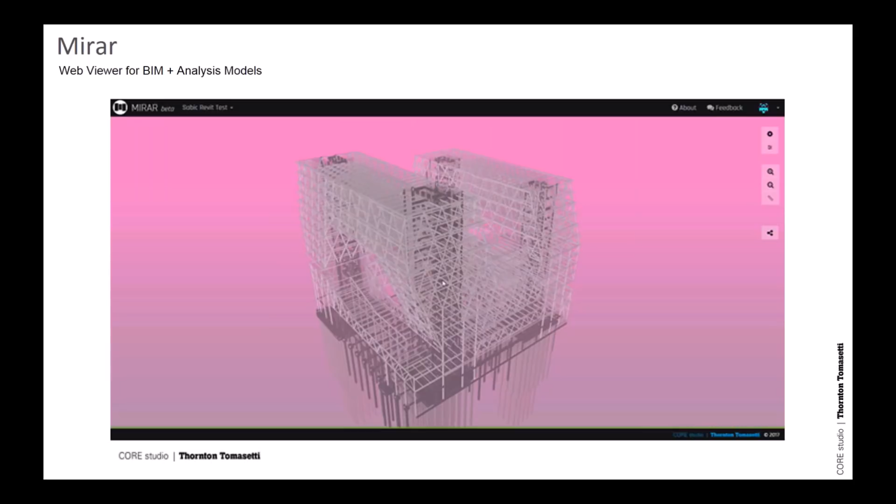It's not exactly an analysis result, but all of our analysis software - SAP, Revit, RAM, ETABS - are not great at visualization, and it's important to see the data more intuitively to show it and also to respond to it and understand the bigger picture. So we're concentrating all that in Mirar, and we're working through different ways of visualizing. We even have it so it can compare models throughout their history, to see what's changed.

In this case, you're just coloring by the attribute, it's basically like a different family, or I don't know if that's an adaptive component that came from Revit.

You can also send this exact view to somebody just as a web address.

Spotlight is a visualizer for Revit data. It always shocks me that Revit doesn't have a great way of doing this. In this case, you're seeing concrete totals by tons per level. It's a very simple kind of number to deal with, but you never get a good picture of your model without this sort of breakdown. You can see that level 1 and P1 have a lot more tonnage of concrete than the others.

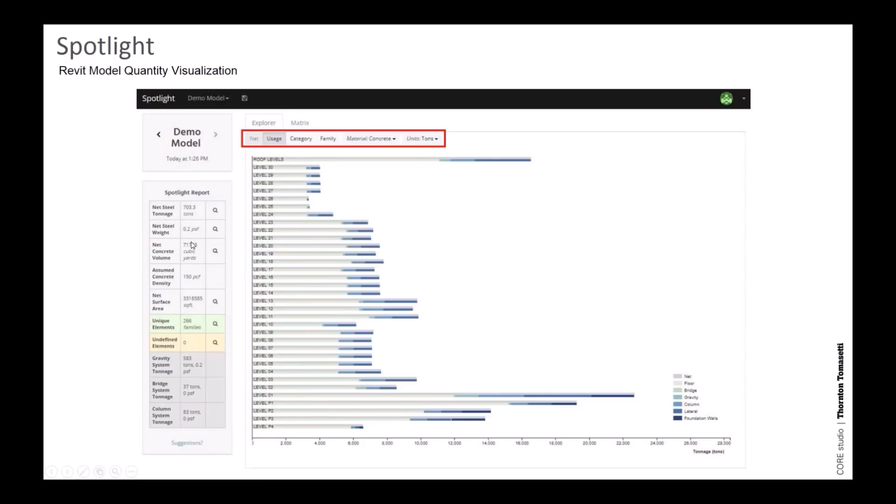Then there are other random metrics: unique families, total concrete volume, steel weight, the number of different families and their volumes, or thicknesses of slabs. In this case, there's this much of that slab, and it's this many instances. It's just a simple way to break down your Revit model.

Asterisk—let me explain what it is. We made this more for architects. It's basically an automatic framing generator for essentially any volume. You input the core and the volume, and it generates a really smart and optimized framing design with a fairly good estimate of sizes, which can get you tonnages for different options. So the point is you can play through different volumes and massing models and get pretty accurate tonnage within a small margin of error.

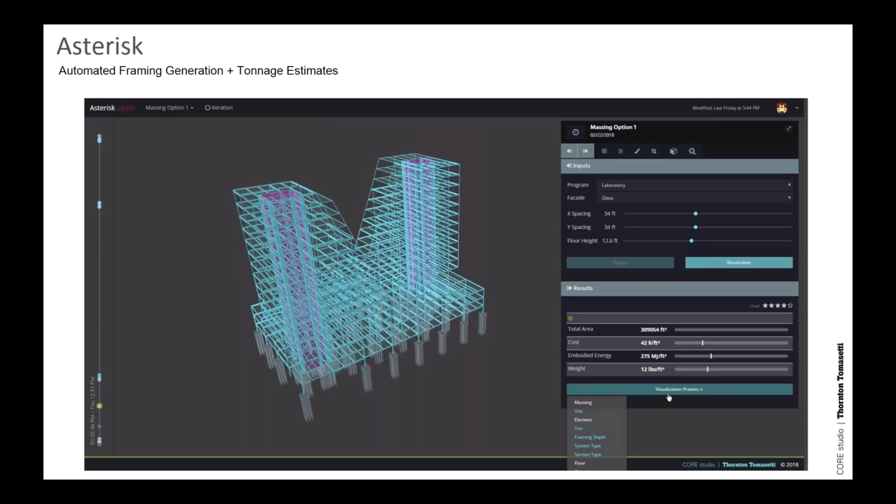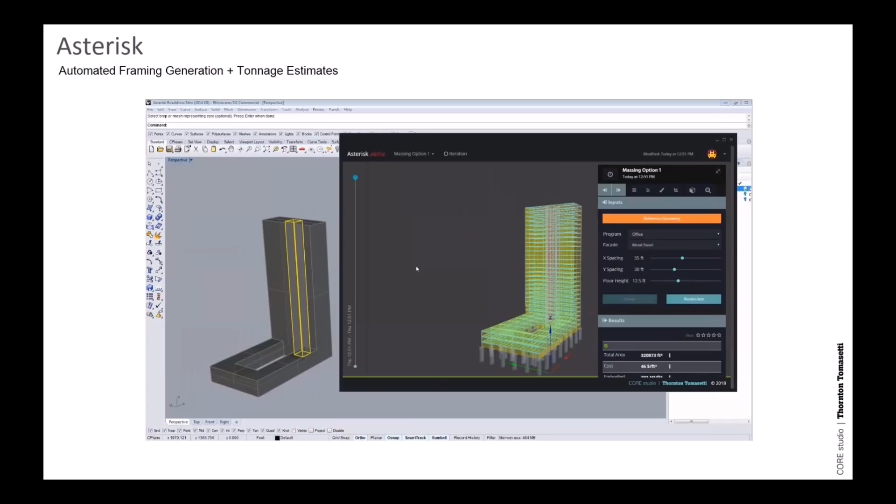I'll just show that video. I think we're in beta now, actually. It basically starts in Rhino, and then it's a standalone thing linked to a web. It's really fast—it's already generated the framing, and you can then adjust it. Your structural grid is kind of the main input. You can see X spacing, Y spacing, and floor height. Those are the main inputs, plus the core, and there's even more detail.

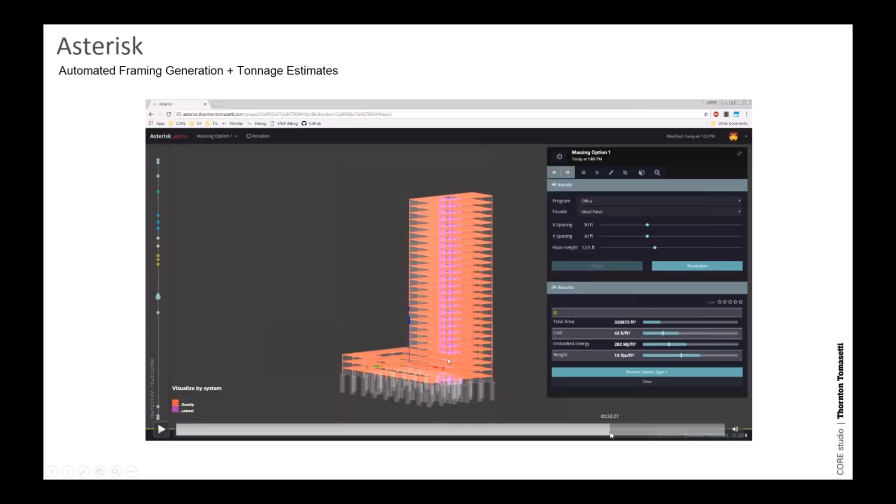Then there's comparing options, which is kind of our Design Explorer approach. If you haven't seen that, check out Design Explorer. It's like going through a larger solution space. Originally it was made for use in Grasshopper, which uses all your sliders to make all the possible options and let you go through them and their outputs. Here are the different inputs, like those spacings I mentioned—XY spacing, size of the volume—and then the outputs, like total cost. You've probably seen these kinds of graphs becoming more and more common.

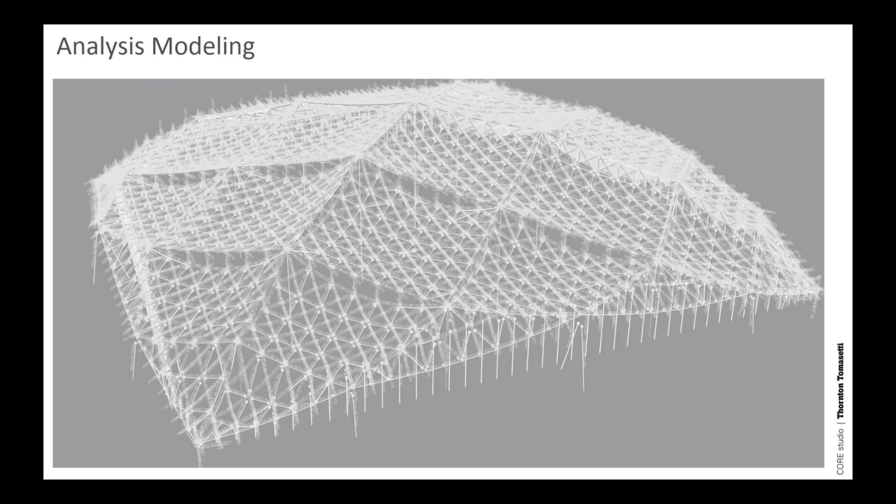And then there's a whole other arm more focused on analysis modeling—this is that Google project. That's another presentation in itself. That's all I was going to show you. Thank you.

Actually, I don't know how they built that. I was around for the very beginning of it, and we were using Three.js with JSON files, exporting a JSON from Revit. I think that's still the basic function of it.

Anybody? I'm curious—a friend of mine sent me over to Design Explorer many months ago. Can you elaborate a little bit about that? And then second, can you elaborate on that automatic framing generator—exactly which things it's similar to and which it's not?

Sure, I can try to elaborate on that. The Design Explorer—let me go back. This isn't Design Explorer exactly, but it's the same thing: these parallel coordinates graphs. You can see it on the website actually. We're on 2 now.

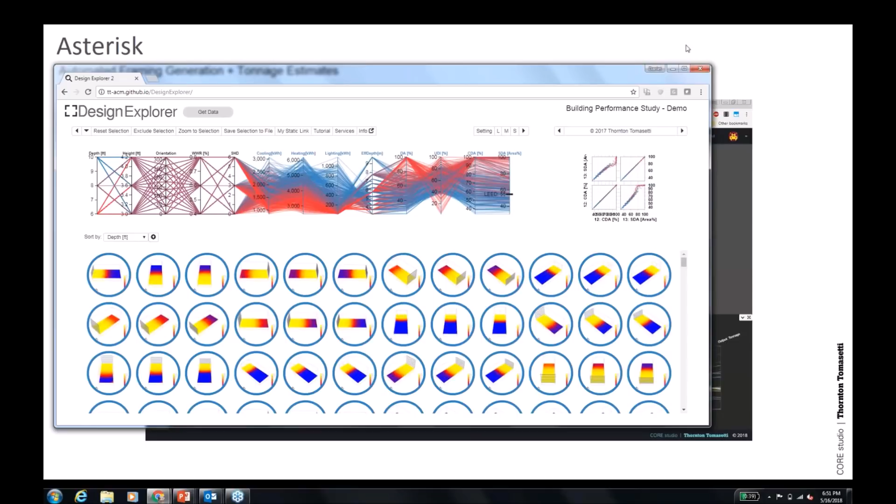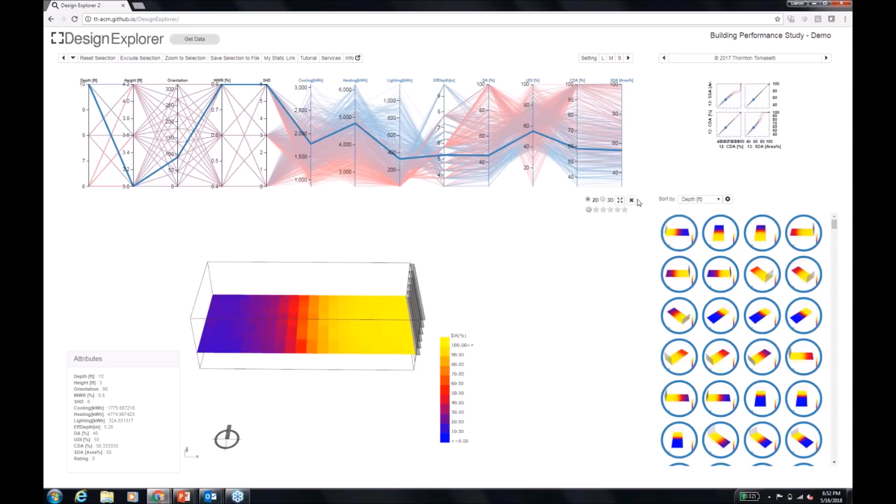So this is the output. You generate this from Grasshopper, and there's a tool called Colibri that gathers all your data and parameters together and outputs them—one, to Excel, which gets you this; two, to images; and three, even 3D models. Each one of these is actually a 3D model you can look at. So the point is, you have a huge amount of possibilities in your solution space, and they all have different performances. In this case, we're looking at glare inside the space, or radiation.

If you have the software power to run all of that, you have it run through all the iterations, do the analysis, and export all the results.

Then you can sort through your solution space by certain parameters to get the range you want. For instance, here's your depth parameter—if you want only lower depth, say 7 to 9 for building depth, nothing too intense. Now you get only those solutions, and then you can filter for things oriented, say, south, and see the performance of those.

Or you can work backwards if you want to get only things that perform well. So if we got rid of these and go back to all the buildings, if you want only—I'm forgetting what these are.

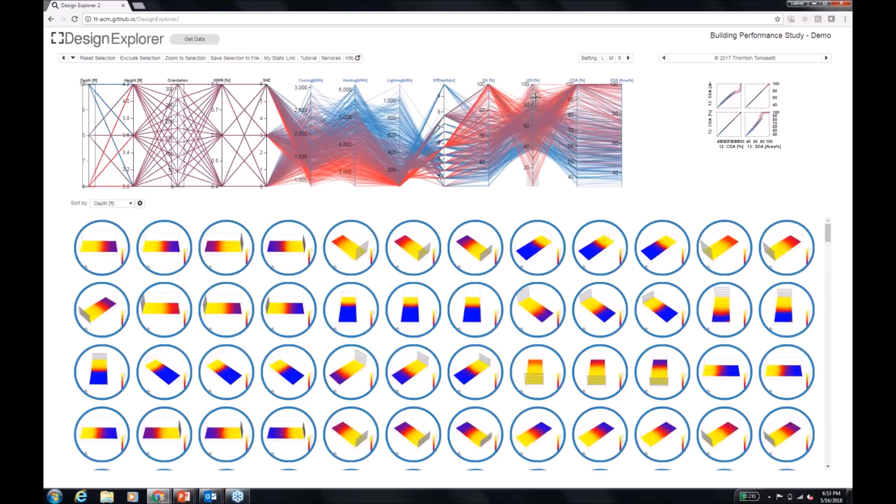UDI—do we have any sustainability people here? What's UDI? I forget that one. If you want only things with, say, the highest percent of UDI, I guess what is that?

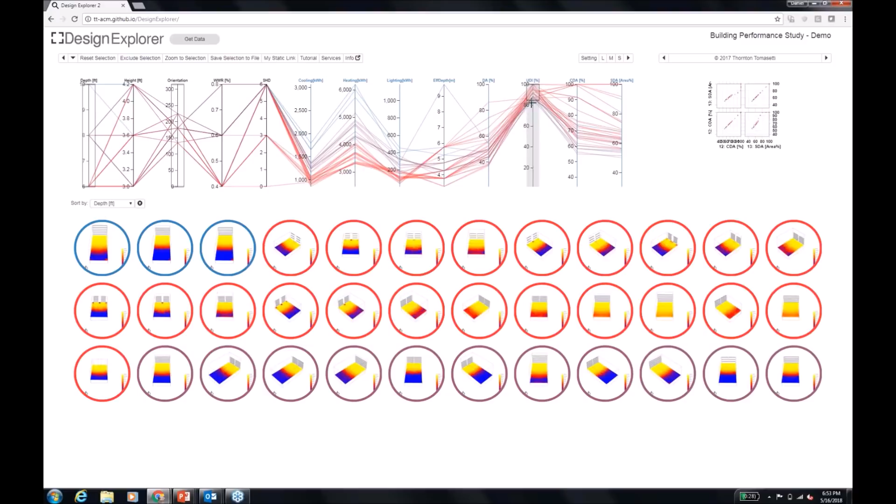Then you can reduce your selection set to only get a few, look at them, and decide from there. This is also looking at louver types and depths—louver depth, not building—and then height, orientation, whatever. So now you've sorted down. That's Design Explorer in a nutshell.

And then there's the asterisk—it's generating the framing and running essentially back-of-envelope calculations, a structural graph, to get basic loading and then sizing it from AISC standard tables.

So you can get a general sense of the loads, not including vibration and seismic. I don't think it uses vibration, but that probably wouldn't be hard to add. That might be too complex, but it's getting a general sense of the loads because it knows the occupancy type, which is how it gets the load, and then sizes it. It can find the load paths and size each frame, so it's a fairly accurate thing without seismic, I think.

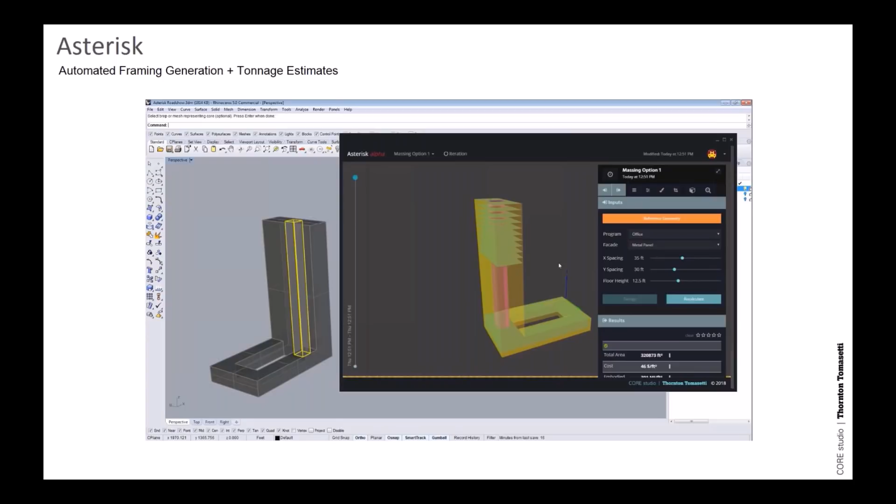All right, that's good with me then. Thank you.